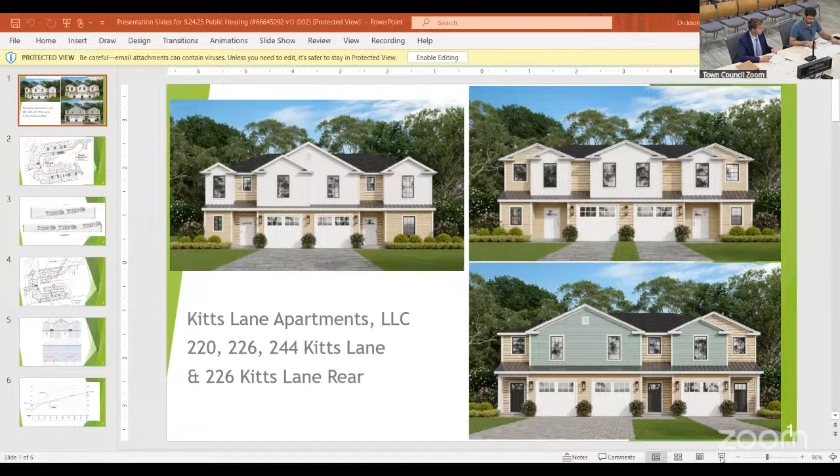So we would request as a condition of approval that the park curbing and the mountable curb be acceptable. The fire trucks are able to maneuver through the site according to that turning plan without running into the curbs. It is just an extra measure that we offer to give the fire chief and his staff peace of mind. I think that's it for the turning movements.

Then regarding the snow storage areas, we have revised them to mitigate the possibility of icy conditions in their vicinity. On the landscaping plan, note 6C was added: particular care shall be taken to maintain emergency access. Snow shall not be allowed to accumulate immediately adjacent to the hammerhead turnaround locations to allow for fire truck overhang. Fire hydrants shall be fully cleared for access. Sidewalks shall be kept clear to maintain additional clear width along interior roadways for emergency access and maneuvering.

So we do not anticipate any maneuverability issues resulting from snow storage areas with those changes. The third concern that we addressed was turnaround of the fire and emergency vehicles at the south side of the site. We provided a second profile, which the fire chief reviewed, and he brought forth the additional concern that there may not be enough clearance at the critical point in the vertical curve.

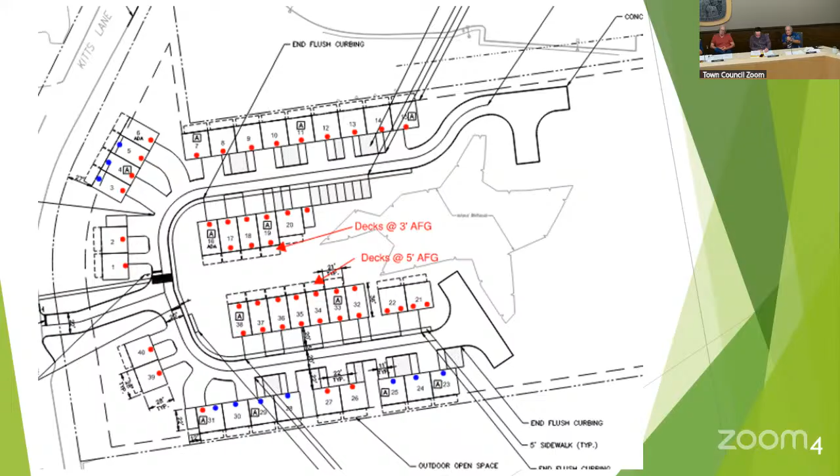Now, if we had to use the ladder truck at any one of the curves, will there be enough room for the pedestals out there, out from the additional 8 feet, 6, out further another 8 feet? Would there still be enough room for apparatus trying to get out the other way to come by? Will they be able to put those pedestals on concrete rather than on any pervious surface? And what about the grades? It doesn't look like, from what I've seen on the plans, that the grades are conducive to a safe setting up of a ladder truck.

So there's a couple of questions there, but what I heard was, can the vehicles navigate the curves? And are the vehicles affected by the vertical geometry of the road? The turning plan you see before you, which is turning sheet 1, shows that the design vehicle, which the town provided the data for, can navigate from the front of the site to the rear and make a 3-point turn around and park. And it's the full-size large truck that the town of Newington owns today, based on the measurements that the fire marshal gave me. I believe that vehicle is as wide as it can be. I don't think there can be a vehicle larger than that permitted on the road.

So the other question about vertical curvature is addressed on sheet turn 2. We created a profile at the critical point in the property where there's a steeper grade and a sag curve. And what we determined in meeting with the fire chief was there is some additional clearance needed. We will address the grading at that point to satisfy his request, that there will be a minimum of 8 inches of vertical clearance under the design vehicle at all points along that curve.

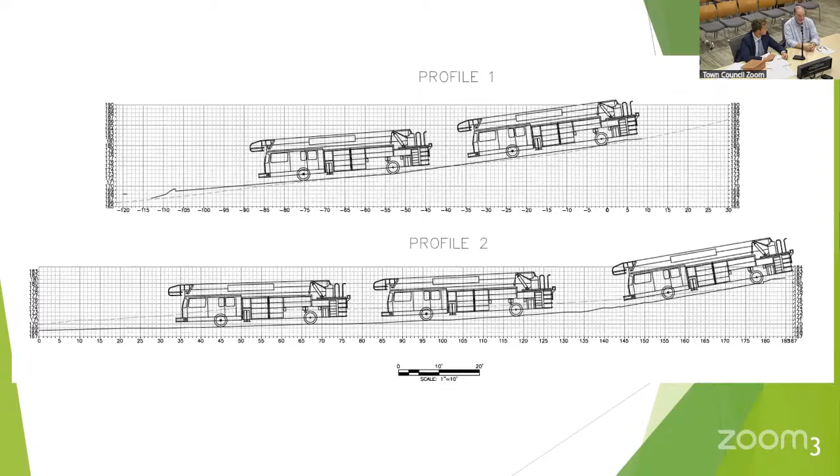And these are not because it's unique to Connecticut, but Connecticut adopts the National Fire Protection Association standard and the International Fire Code standard. And these are requirements that are applied nationwide. And they're developed by technical committees that have members from the National Fire Chiefs, fire marshals, building owners, fire truck manufacturers. So every philosophy is represented in the technical committee and the use of the rules.

I mean, part of my concern is there are some condominiums that were built, as you say, a number of years ago that have one way out. Absolutely. There are others that do have them, but they're few and far between. Right. And that's a concern because if everybody's trying to sail out of a situation, it can get messy.

Well, I'll tell you, we have communities in New Haven, Hartford, Boston's a great example, where the road width was based on carriages from the 1800s. So the fire department deals with them like a long driveway. So the engines assigned to that area don't carry 150 pre-connects. They carry 250s, 300s.

Mr. Chairman, I'd like to ask two other points away from the fire issue. The T2 survey, which you could object to, are you adamant that you wouldn't have any interest in performing that? Correct. You're satisfied with the level 2, which was the flight over the area that Mr. Tarbuck performed. And then the supplemental one that he did, I'm not clear on what's involved in the supplemental. Do you have more specifics you can give us on that? Yes.

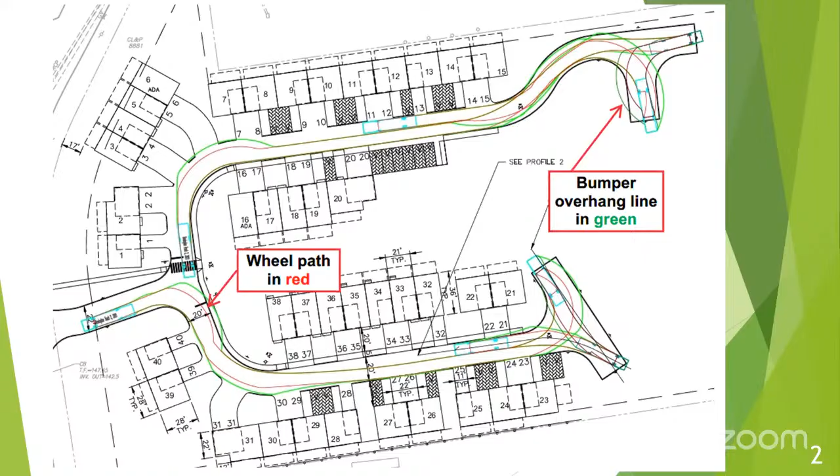Okay, Chairman, just trying to verify the topography. I'm not looking at grades and elevations and topography. Is 8 foot going to be adequate enough to basically rise above the elevation of the resident windows? I'm just trying to get a handle on that. It's not going to be enough to completely cover the unit, but again, with the other sound attenuation measures that we've proposed, we believe it's adequate. Okay, thank you. That's all. Thank you, Mr. Chair.

Mr. Chairman, and Mr. Planner. Attorney Moran, if this would work for your flow right now, if we could bring in Mr. Brooks, since we're kind of talking about noise right now. Yeah, that's right. So, Mr. Chairman, if I could, can I just ask a question first? Yes. I have two, actually. One's for you, but the first one's for Attorney Moran and Mr. Bestich. I just want to make sure that we're clear.

When you spoke earlier, you said that the fire truck maximum, any vehicle maximum width in the state of Connecticut without being placarded is 8'6". That, I believe, somehow got interpreted at this table that the fire trucks are 8'6". Everything that you submitted to us on your documents shows the fire truck 8 feet. Okay, excluding the mirrors. So they're 8 foot, not 8'6".

Right. Okay. And then, Paul, to you, our regulations, I'm assuming state statutes, allow a road to be 20 foot wide for this type of development. Is that correct? I would have to check the regulations specifically, and I can definitely get back to you on that one, but I do not see anything that requires too much in the regulations. Most of those are actually either by the subdivision regulations or by the engineering details for the town of Newington.

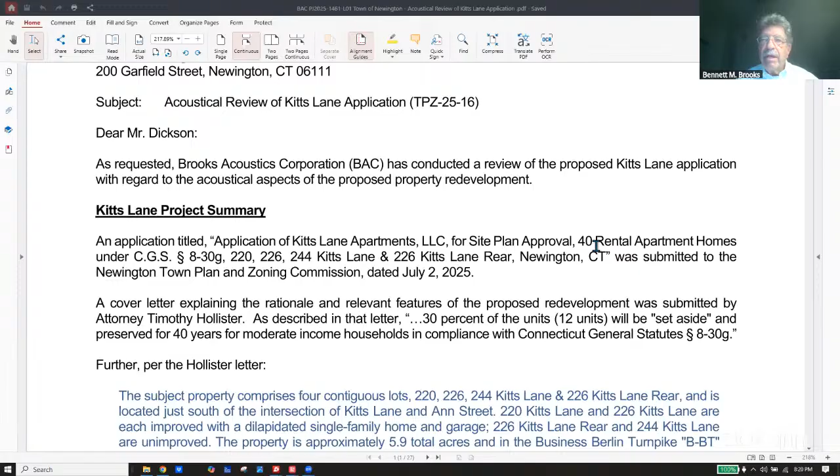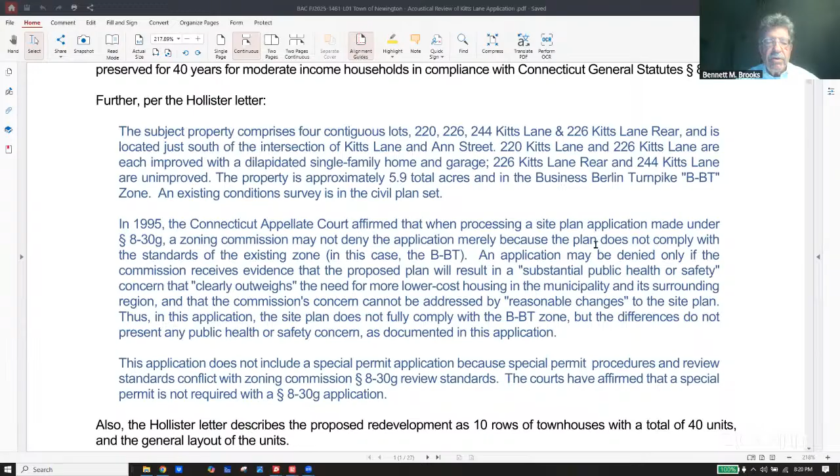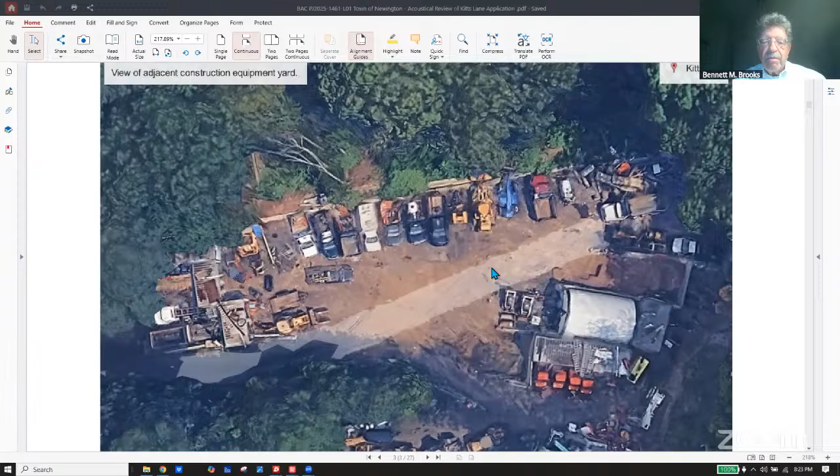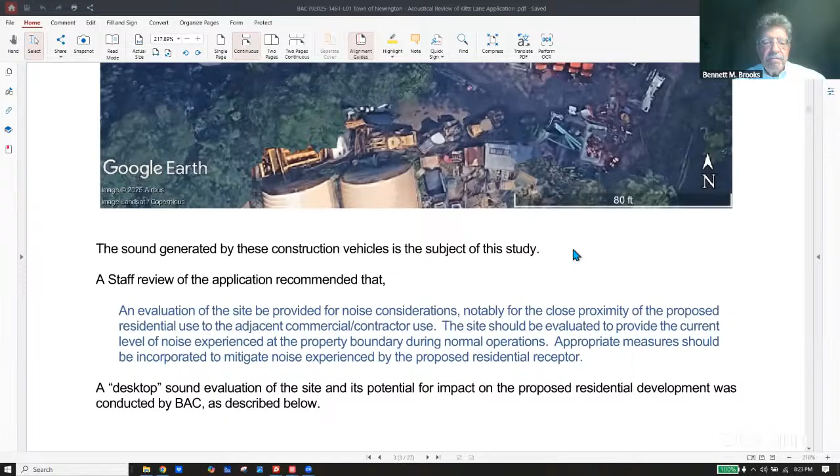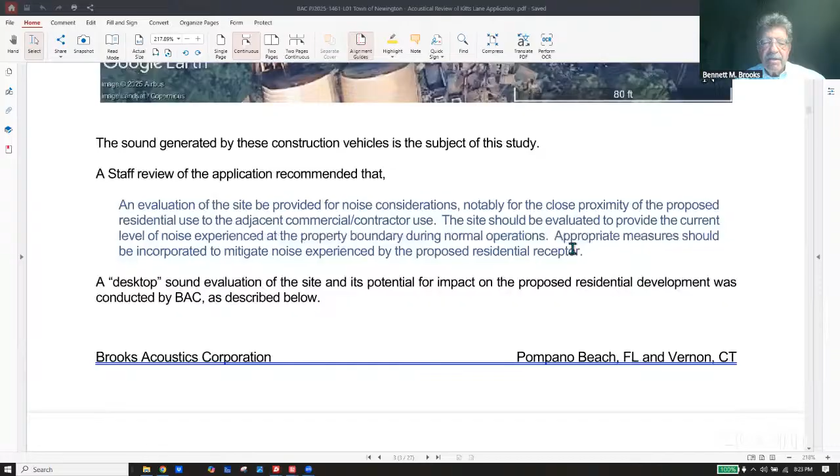So it was reported that these would fire up early in the morning, and people have noted the early hours, and then would go to a job site and may return later that day. There may be some pieces of equipment that are being repaired or otherwise used on the site during the day. We're not sure, but it probably depends on the day-to-day operations that they're doing. So it was a staff request, because of the proximity of this activity to the proposed development, that it be studied in terms of noise impacts. And so that's what we did.

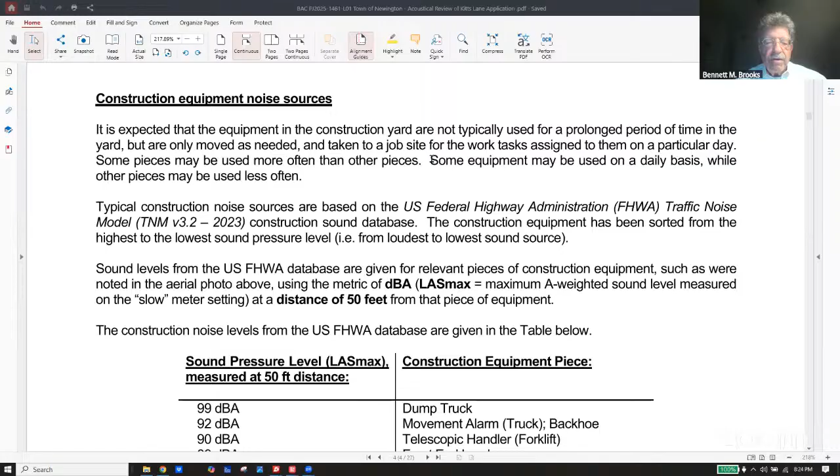Doing an analytical study, or what's been called a desktop study, using typical sound levels. There was no sound survey to see exactly what sound is emitted by the existing use to the south. So we used typical sound data from the U.S. Federal Highway Administration, which has software called Traffic Noise Model with a construction sound database.

Here's a selection of some of the pieces of equipment that are typical, that we saw from the overhead view. There may be others, but this is a pretty good list. I don't think they're pouring concrete in there; concrete trucks are a little bit louder.

So we went from about 80 dBA, decibels. The little d stands for deci, or 1/10. The B is for Bell, after Alexander Graham Bell, the telephone guy, honoring him. And the A is for A-weighted human hearing sensitivity, which is what most of the regs are written to, this metric, dBA. The Federal Highway Administration measured all these things and gave us data at a 50-foot distance, normalized to 50 feet.

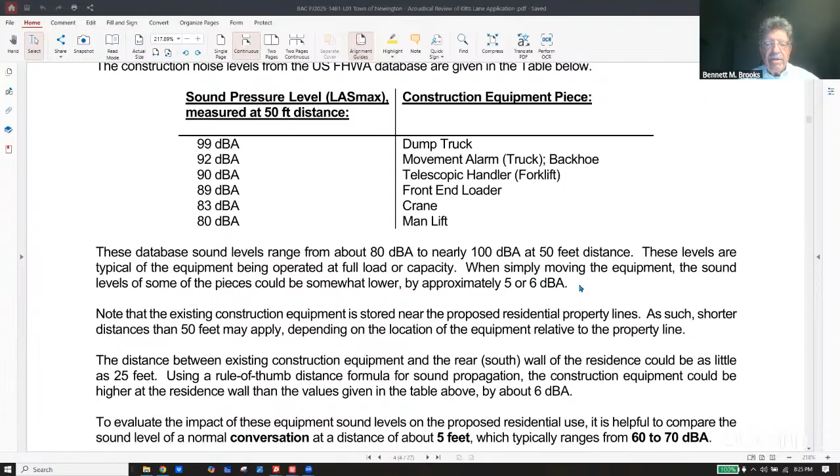You could say, well, if they're operating under full load, this is what they'd be at max, and maybe the levels are a little less if they're just moving, leaving, or getting loaded onto a trailer, for example. So we took that into account by allowing about 5 or 6 dBA below these numbers.

Then there's a distance rule. These data are normalized to 50 feet, so we said, well, they could be as close as, say, 25 feet to the proposed residence. That cuts the distance in half, and the distance formula rule of thumb is about 6 dB per doubling of distance, just based on the geometry, not walls or trees or anything else, but just distance. So that kind of is a wash.

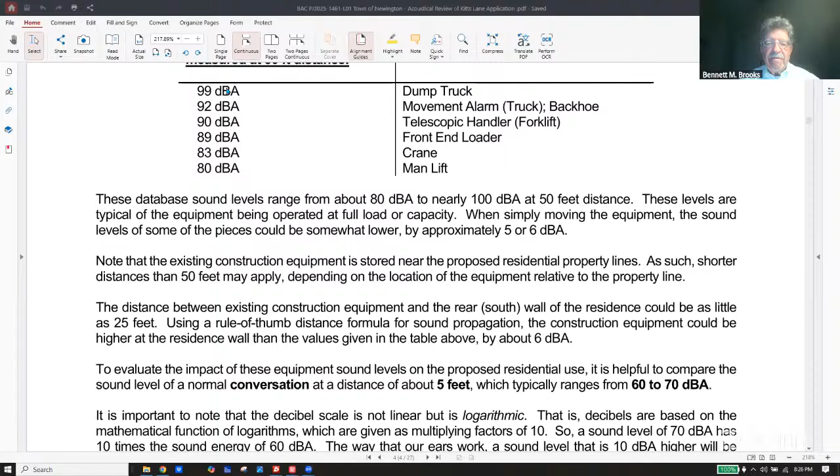So we'd say, okay, these are pretty good numbers for what would be impacting the south facade of the proposed residences. To compare, the 80, roughly about 80 to 100 depending on the piece of equipment, a typical conversation would be at a distance of 5 feet.

You always need a distance when talking about sound pressure levels. The closer you are, the louder it is; the further away, the softer it sounds, and the numbers bear that out. So a conversation is about 60 to 70, compared to 80 to 100 as the equipment goes. And that's without any treatment -- that's what you'd get at the south side of the residences: 80 to 100.

Now remember the decibel scale is logarithmic, not linear. 80 is not double of 40 -- it's actually 4 decades above it. It goes by factors of 10, sort of like the Richter earthquake scale. So 50 is 10 times the energy of 40, 60 is 10 times 50, and so on.

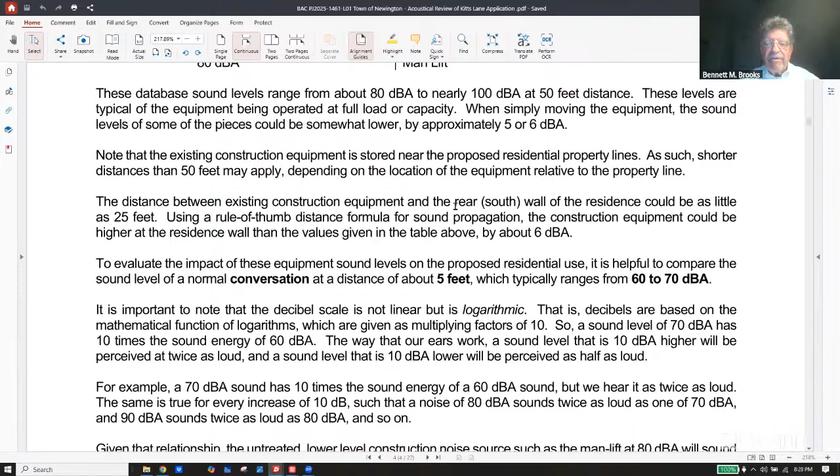But the way our ears work, a 10 dBA higher sound is perceived as twice as loud. We don't follow the sound levels directly -- we get less sensitive as it gets louder, which protects our ears. So when you think of a 10 dB increase, it's roughly twice as loud. If you went from 60 to 70, approximately, you'd say that sounds about twice as loud, and going the other way, about half as loud. That's something to keep in mind.

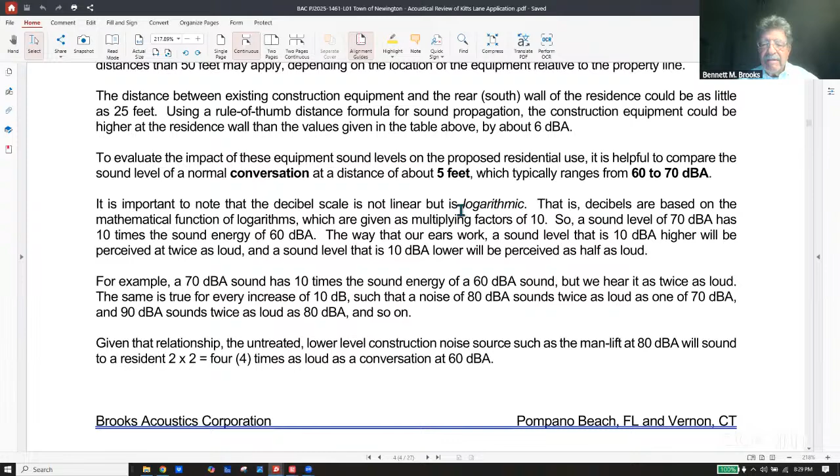As an example, let's say 80 dBA from one of the equipment pieces, the man lift -- if you drop to 70, that's 10, and another drop to 60 is like a quieter conversation. That man lift will sound about 4 times as loud as the conversation. That's something to keep in mind, and that's the perception.

So once we had that settled -- the sound sources and typical levels -- then we go to the plan. What we were able to see in the plan is that particularly units 23 to 31 are abutting the south property line. So looking through that, we developed...

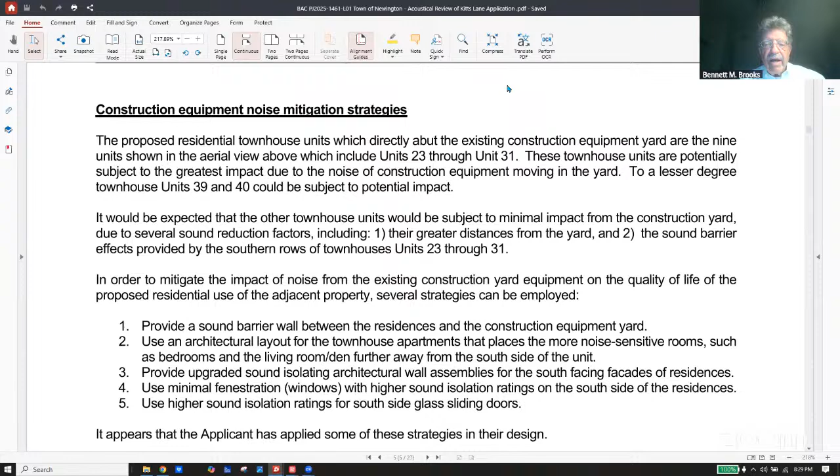...5 strategies or concepts that can be used to reduce the impact of any sound, or if perceived negatively, noise, from the construction yard to the proposed properties. One was the sound barrier, which was mentioned also -- the attorney for the applicant mentioned these, so you've heard them. Another is adjusting the layout of the building so that sensitive areas are further away, on the other side of the building from the noise sources.

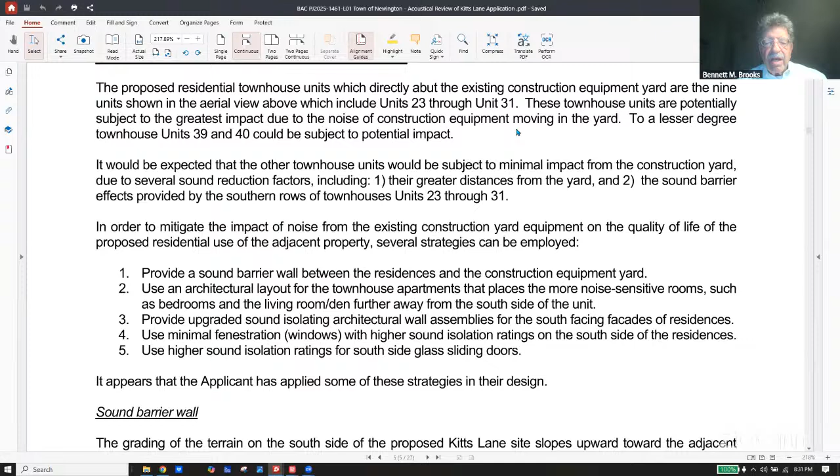It's important to make sure that the south side wall assembly is robust and will be able to block the sound that hits it. There's a lot of ways to do that, so I didn't specify a particular assembly. I'm not sure if this is even going to be stick built, but if it's timber construction, it could be an 8-inch or 10-inch stud, or double studs. Masonry can do it too, and of course insulation is important. You may need a double layer of gypsum wall board, GWB or sheetrock on the inside that's furred out or on its own tracks, its own stud row. So there's a lot of things. That's a design issue. This building hasn't been designed yet, but that's something they need to pay attention to, and they said they will.

And then the windows - the windows are the weak spot, the weak link. You get a good wall, then the sound coming from that source will go through the windows because they're lighter. They tend to transmit more sound. They're not as thick, and they don't have the advantage of having two panels that are as much as half a foot or even more apart normally, because they're probably operable, I would think. So they have to be tight windows with good glass and higher ratings. And they did a good thing on their concept or schematic drawings where they limited the number of windows on the south side - there's just a few bathroom windows and one over the kitchen sink.

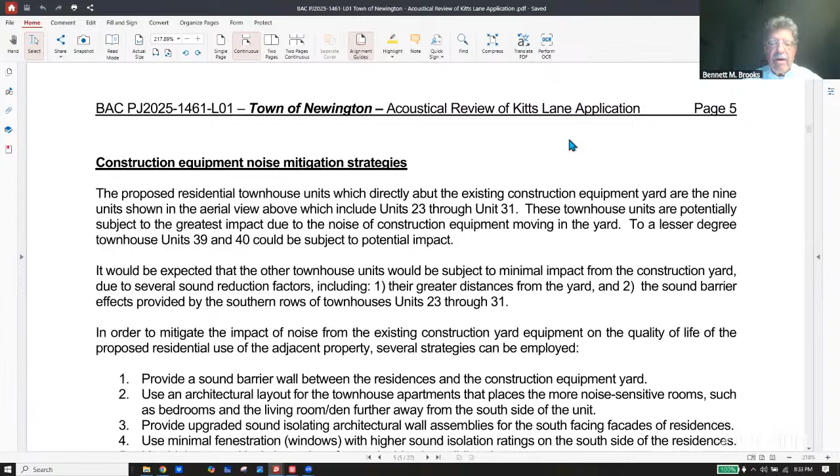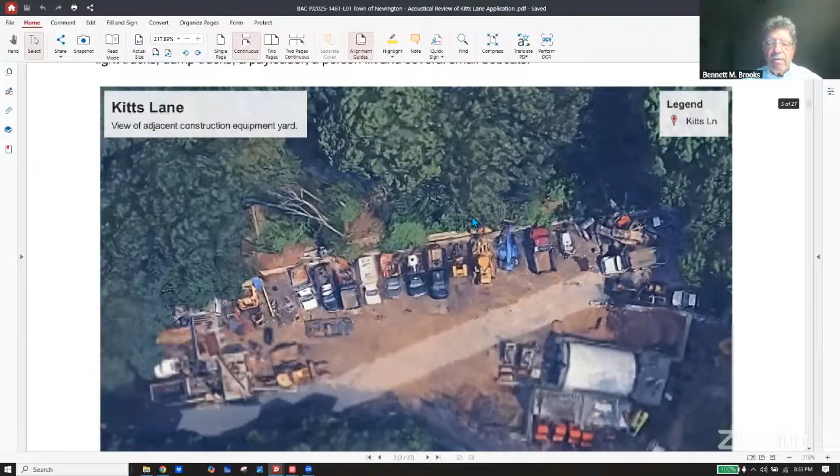So let's talk a little bit about these design strategies. Here's some elevations that were provided in the application. The one on the left - those we got drawings for units 26 and 27. If you remember, we'll go back there just a moment to show you. Those are these two kind of in the middle, sitting by themselves. And here's another to the east, a row of 3, and to the west, a row of 4. They have different floor plans and different sizes, but we got sketches for these two in the middle, so that's what we analyzed.

Okay, back to there. So you can see very limited windows, smaller 2 by 2.5 foot size windows for the bathrooms upstairs, and then one over the kitchen - this is bigger, it says 5 feet width. I assume it's going to be a typical standard door size, 7 feet high, so that would be a 5 by 7. So most of the sound downstairs is going to come through here, and then some up here in these windows. And then you can see on the east and west side, there are no windows.

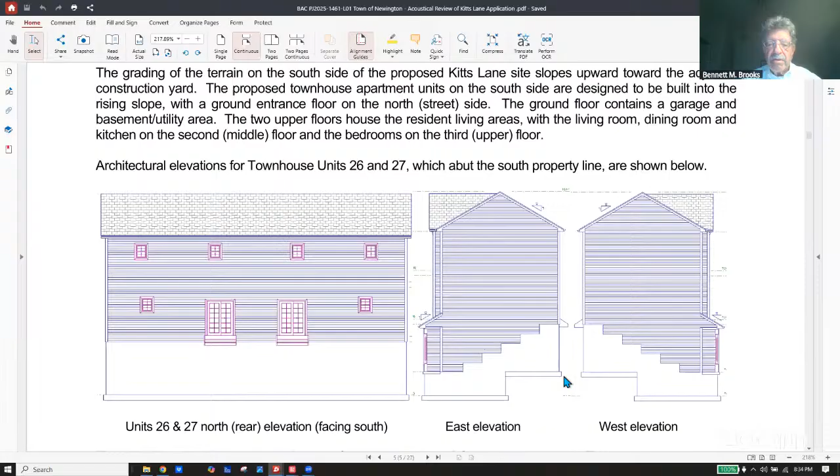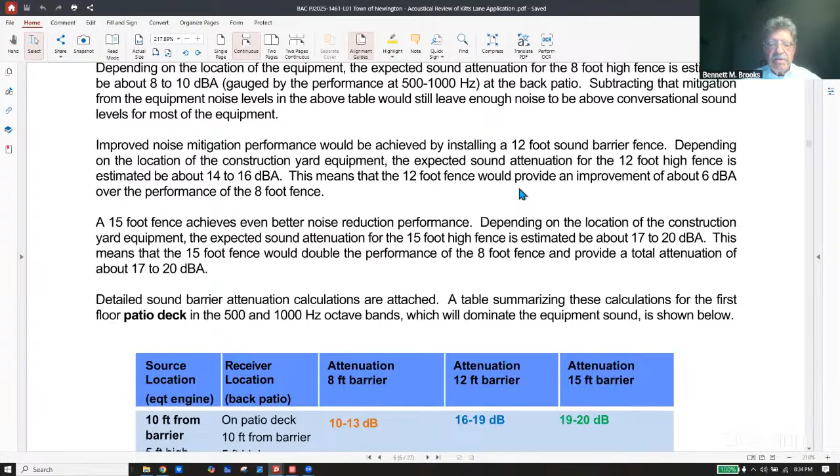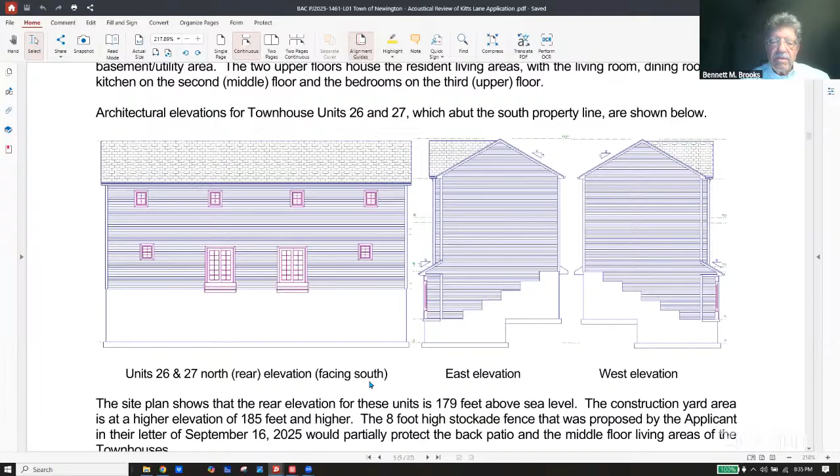Okay, so we did a fairly extensive study on the effects of different fence heights, because of the changing terrain. If you go back, you can see here that if we're looking east, the front of the building is at a lower elevation. So where my mouse is, that's where the construction yard is relative to this side of the building. This is the back, and if you want to get to the construction, you go up a hill further, and it continues sloping up there. So if you look at the site plan, the back of this building is flat, at 179 feet. Where the trucks are driving around is about 180 to 185, and it goes up from there to 190, 200 feet. So the vehicles are going to be at higher levels, sort of comparable with the second floor. You can see there's quite a slope going back up to the construction.

So given that, we took a look at building up from 179, which was that back lot line. We used an 8-foot barrier, which was proposed, and also calculated the numbers for a 12-foot barrier. All of those calculations are included in the back of this report if you want to walk through them sometime - you're more than happy to do that. But basically, it depends: if you're lower down and you're shining a light at the barrier, there's going to be a little sound that peeks over the barrier, just as you would expect. And that's not even light waves, it's sound waves, which are much bigger than light waves, so they tend to bend around corners, if you will. That's what the calculation takes into effect.

And so the lower you are compared to the barrier, the more attenuation or sound reduction you get. And then the other feature that we need to keep in mind is that if we were to shine a laser beam on our receiver from where the sound source is, the truck, say the truck engine, its radiator, which is say about 3 feet high, three to 4, depending on the equipment, and then the exhaust might be 8 or 10 feet high, or maybe low as well. But 5 feet as the source height is a pretty good compromise.

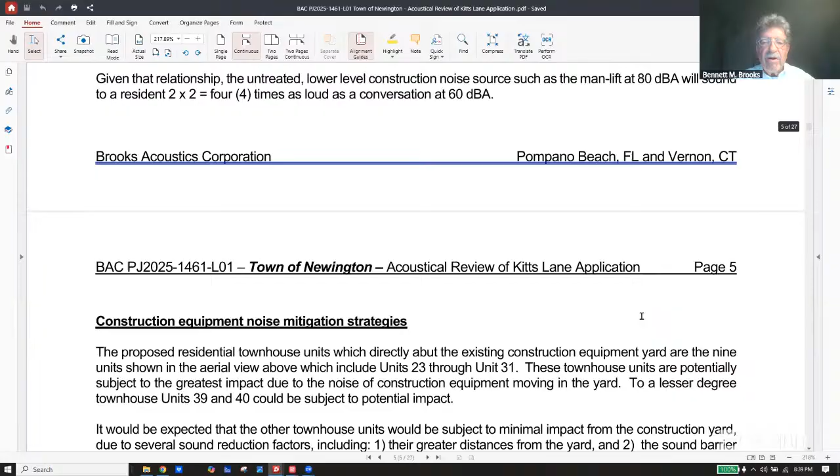Okay, so with all that said, as we move further away from the barrier to the other side of the construction yard where there are vehicles going to be moving around here, you might be 10 feet away here. If it's a 20-foot truck that's in there, they're backing in. So that's good. The engine's pointing to the south, but you might get the exhaust underneath or there might be a backup alarm. So we took 10 feet and then about 50 feet for this equipment over here. You're getting less of a barrier effect for these when they're down at 50.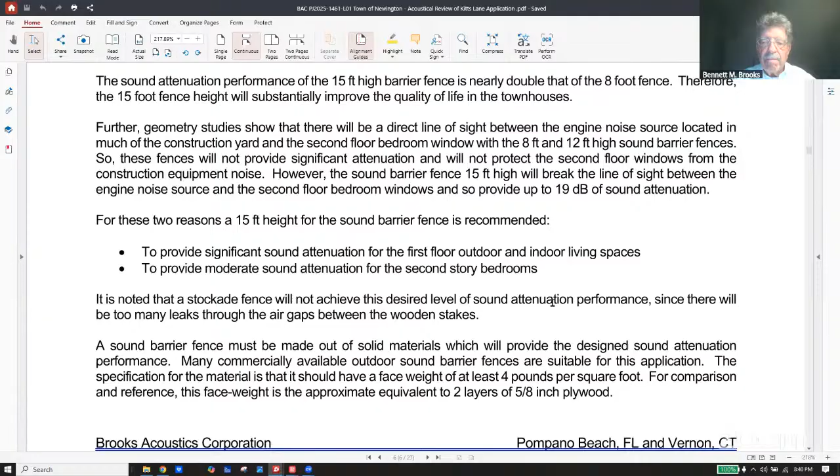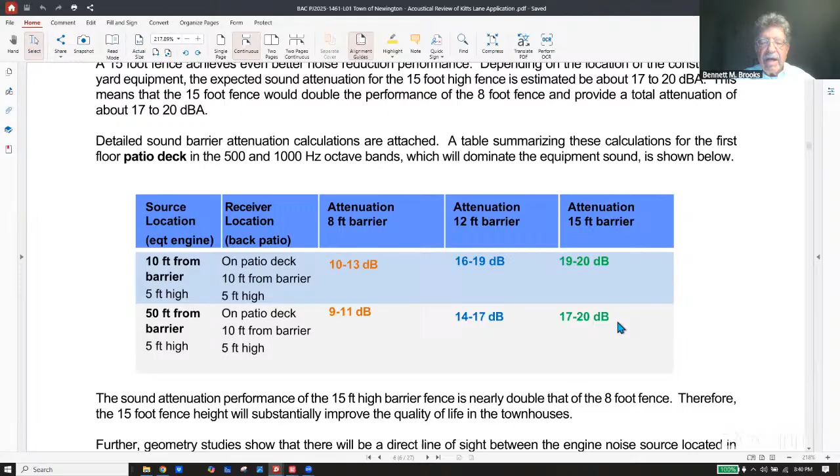Okay, so bottom line, we're getting better numbers out of the 15-footer as you would expect on the patio deck. And then we move to the architectural layout, which seemed to be a good job. You're not getting much here on the first floor, which is actually the middle floor, the ground floor. I guess the basement is the garage. I didn't show it here, but it's on the plan. You do get the kitchen in between, but it's a fairly open plan. You do have the stairway going up, but it's fairly open, so the sound is going to bounce around or reverberate inside here. And we didn't take any benefit for that. It depends on the furnishings a lot too.

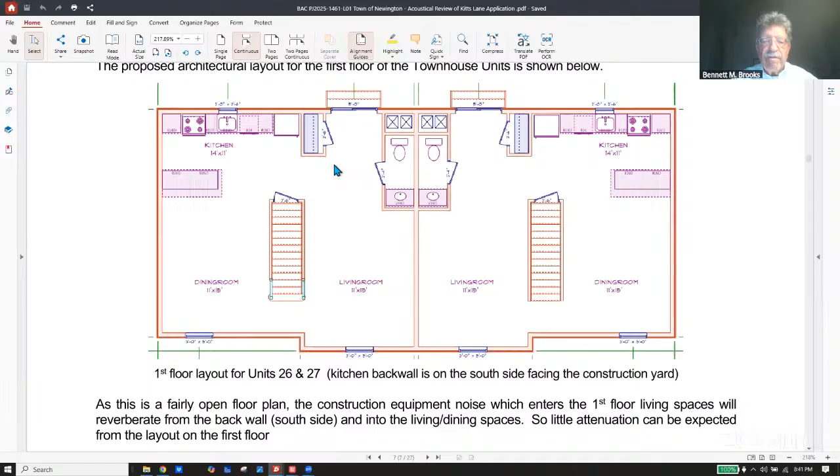So you might get a few decibels reduction in this plan on the first occupant floor. But in the second floor where the bedrooms are, and this is probably more important because this is where people sleep and they want it quieter at the late hours of night or early hours of the morning, the benefit here is that there's a wall assembly in between with doors. The bathrooms, this is a good space. Space provides sound attenuation. So we have a lot of that going on with the laundry, I believe that's the laundry, and then the bathroom here. And both bedrooms have an ensuite bathroom.

And here's another closet too. So there's pretty good attenuation going through this way. And we were very conservative. We took about 12 decibels for that. It could be a little higher. Somebody might leave the door open, so that would allow more sound through. And so that situation is to be approved of. It's a good situation.

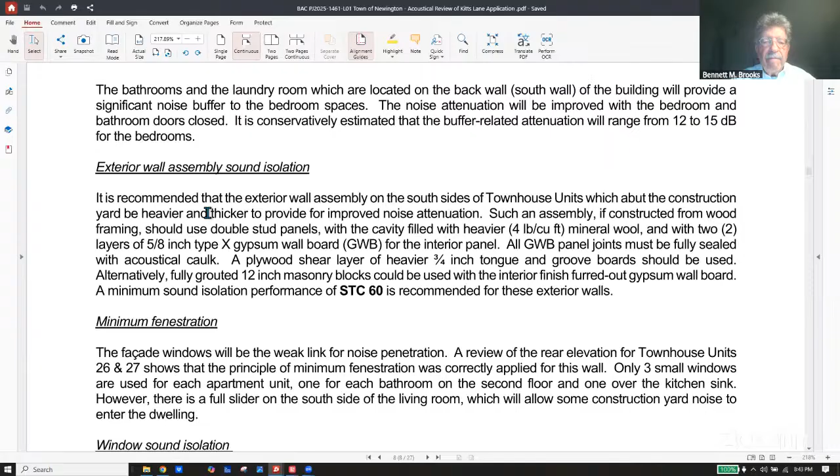Then the exterior wall, we said, here's some suggestions as far as the mineral wool, layers of gypsum board. Some builders are building without a shear layer. I've seen where there's a piece of plastic as a vapor barrier, and they just throw a few extra 2x4s in there for shear so the building won't tip over sideways. But most builders, I think, are using shear layers, some plywood or OSB. So you want that heavy one on the south side of the building.

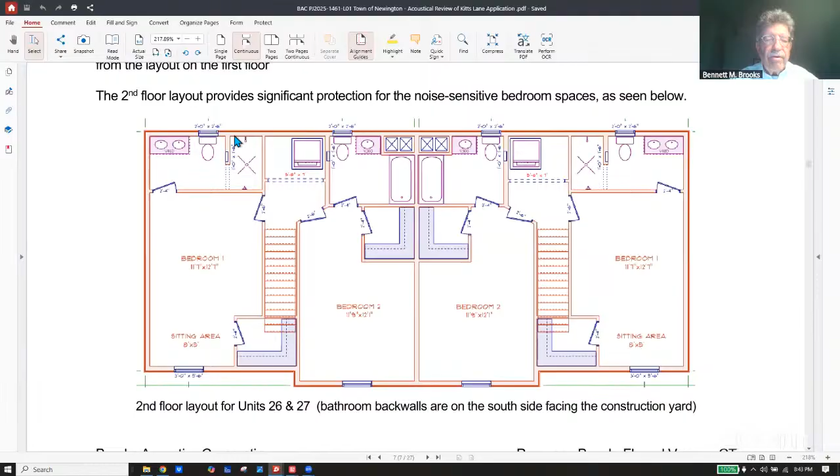And so there are many different assemblies that could be used, but to give it a performance factor, we specified that it should have a minimum sound isolation performance of STC 60, which stands for Sound Transmission Class. That's a standard rating. That's fairly high. If you're in an apartment, this demising wall, for example, state code minimum by comparison is STC 50. So from this bedroom in this unit to this bedroom in that unit, you need to have at least an STC 50, and we know what assemblies will give us that.

And my recommendation to any developers is always go higher than that, because if you design to the code minimum, there's at least a 50% chance that you're going to fail. That's not part of this review, it's just a rule of thumb. And some of my colleagues say it's 70 or 80% failure. So we usually put a 5 decibel safety margin on any specification that has STC for sound transmission.

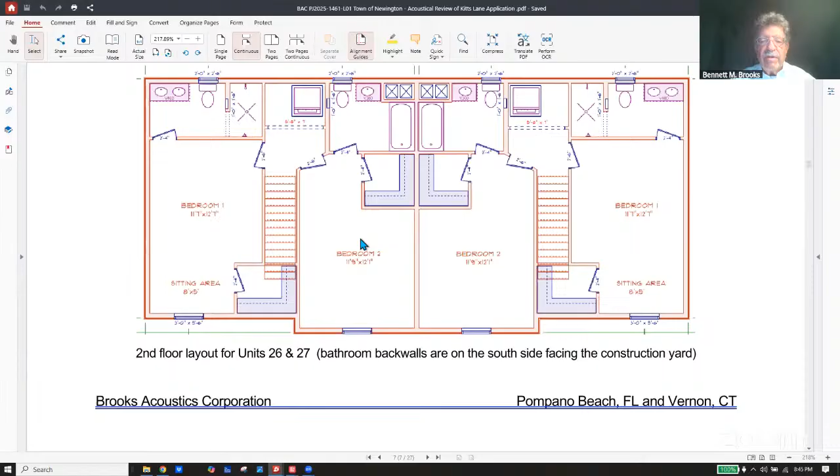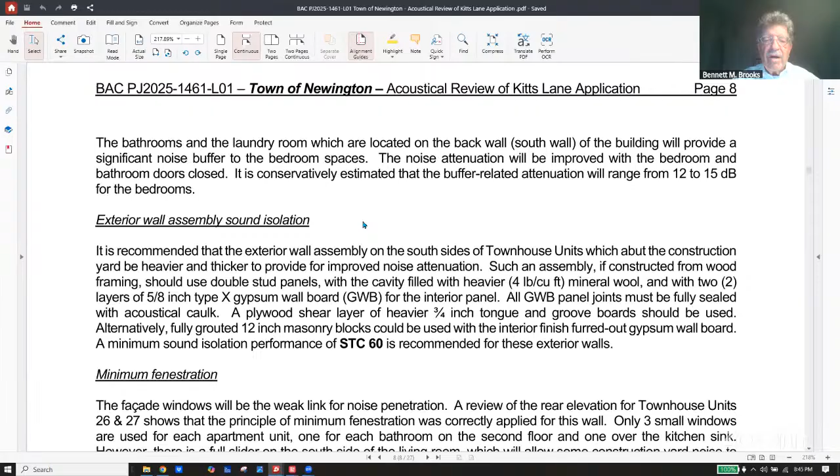So just for safety, for installation issues, somebody maybe forgot to caulk the runners and then it's covered over and it's too late, things like that. So there's always a lot of detail to be done to get good sound isolation. The little caulk gaps, believe it or not, are a mouse hole and let a lot of sound out or in.

And so moving on from that south assembly, we want to have the minimum windows, which they did a good job on, smaller windows. But each window needs to be double pane, double glazed, insulated, so there's an air gap of at least a half an inch, and then laminated glass, which gives you a little more. They could be two 1/8 inch panels laminated with a 60 mil plastic in between. That gives you better sound isolation than just regular glass, because if you bang on a window, you'll hear it ring a little bit. And the plastic lamination gets rid of that. It's also safety.

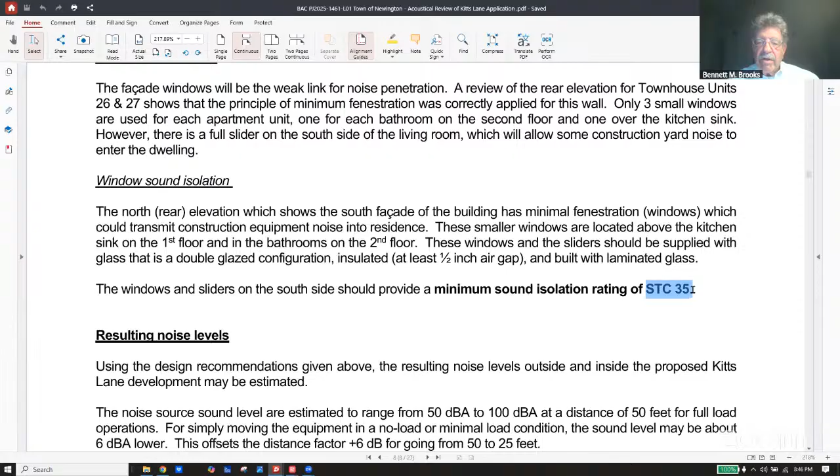And so if you have two of those laminated panels with a half inch between, you're pretty much going to hit STC 35, which was our recommendation there. Many types of windows are rated for storms, hurricanes, object protection for things flying around, like propane tanks in the air hitting your window. So if you get a good hurricane window, you're probably going to hit the STC 35.

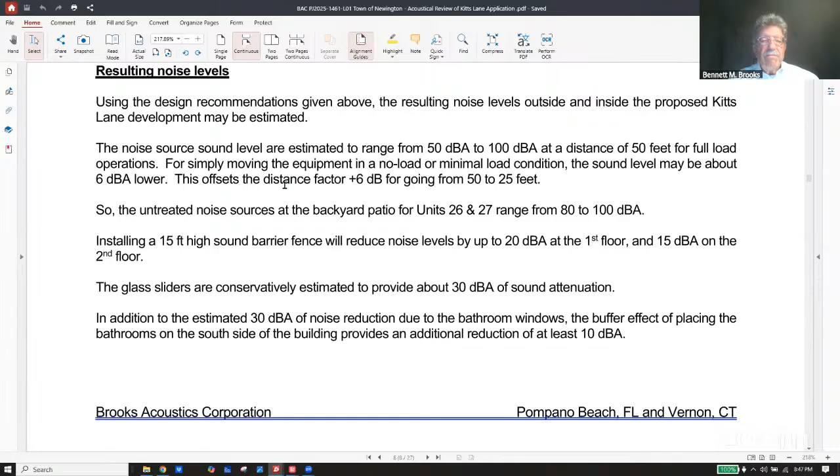And then we said, okay, given these types of strategies, what can we expect at the residence? And so there's a typo, sorry. That should be 80 to 100 at 50 feet, at minimal load, but 25 feet closer. So we're still looking at 80 to 100. The untreated noise levels are expected to be 80 to 100 dBA. That's pretty loud. Your vacuum cleaner is about 75 maybe. A conversation could run from 60 to 70.

You'll have a battery operated hand circular saw that's going to run somewhere in this range, 80 to 100, depending on what you're cutting and so on. So that's a pretty loud thing to happen at 5 in the morning in your backyard. So that's why we recommend a 15-foot high sound barrier, which will reduce the levels up to about 20 on the first floor and up to about 15 on the second floor. So the sound barrier fence or wall will do a lot of the work, but we have to piece together the sound attenuation.

So the next piece are the glass sliders. That's a pretty open spot. That's going to be your weak link if you have a good wall assembly. And we'll say about 30 dBA of sound attenuation, practically speaking after installation, even though it's an STC 35. The STC doesn't exactly match dBA, but we'll conservatively say we'll get about 30.

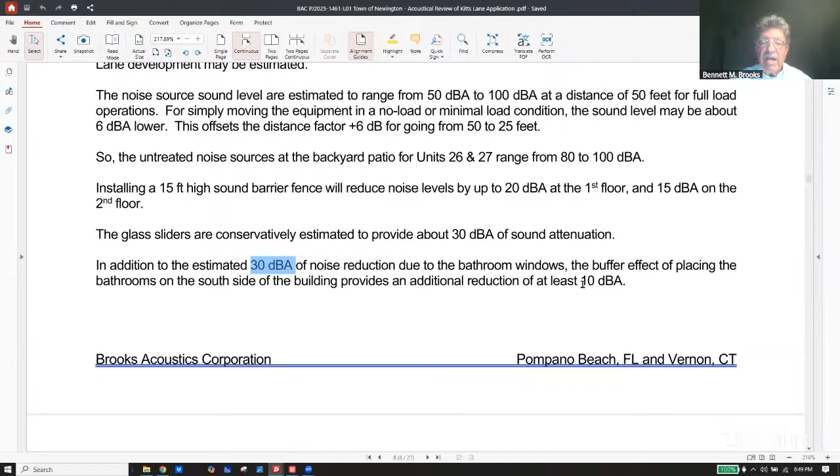And you might get 32, you might get 33, but we'll say 30 here. And then you've got the living room, and that's downstairs with no buffer effect. Upstairs, we'll get the 30 dBA in the bathroom windows, and then we'll add on another 10 dBA over that in attenuation because of the buffer effect. So now let's kind of add all that up.

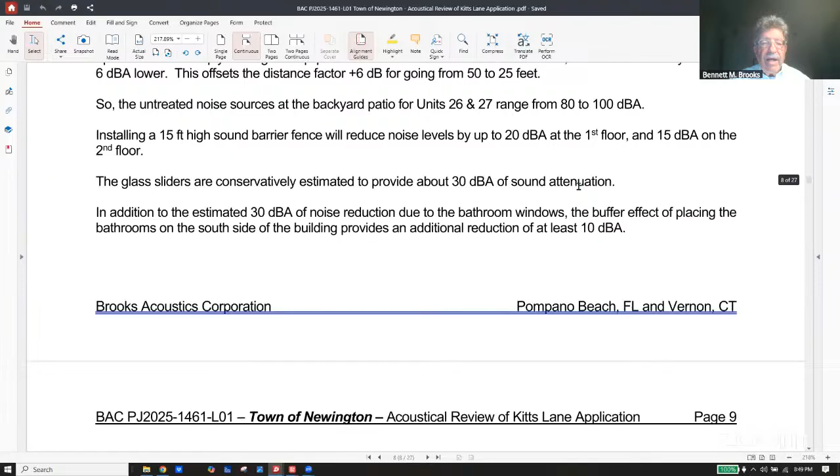As we said before, on the outdoor back patio, you may be 60 to 80. You're probably not doing a cookout at 5 in the morning, most likely, but you might be at 4 in the afternoon. So that's something to keep in mind. That's untreated. Okay, so let's take a look: if we go back and say we're going to get our 20 dB from the 15-footer wall, now your back patio is 20 down from these numbers. So you are now 40 to 60, and that's pretty reasonable.

Oh, excuse me. I'm sorry, I already took that into account. We were 80 to 100, and now we're 60 to 80. My mistake. But that's conversational level. It could interfere with conversations, or it could sound loud. It could be irritating. It's an inconvenience factor, I think, is the way someone described it.

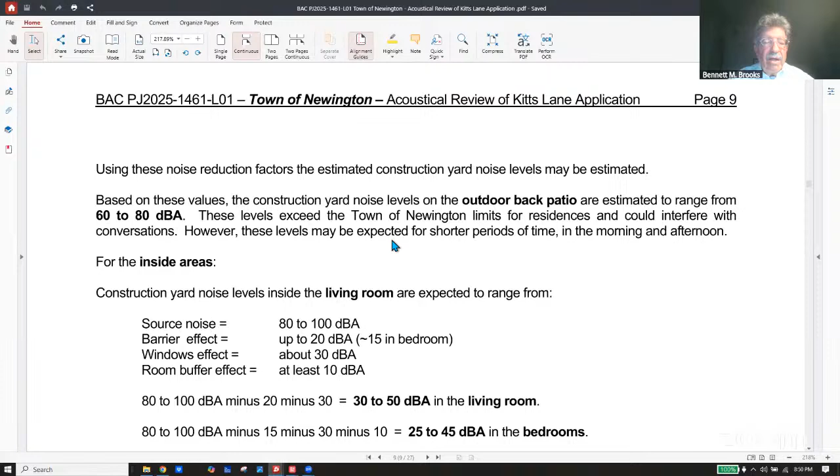Okay, that's outside. So now inside, where we want to be even a little more careful, we'll take those source numbers that we were just talking about, 80 to 100. Let's take, for the first floor, 20 dB off of that. We'll take off 15 in the bedroom. The window effect will give us another 30. And upstairs in the bedrooms, we're going to get at least another 10.

So just doing the math here on this line, 80 to 100 minus 20, which is the first floor, minus 30, which is the window effect. So now we're at 80 to 100 minus about 50. That gives us 30 to 50, if I did my arithmetic correct, in the living room. And that's not bad.

Your various authorities, health organizations, the EPA and so on say that if you're 45 to 50 or so in a living area inside, that's acceptable. So we're definitely in the acceptable range or lower inside with all of these mitigation effects in play.

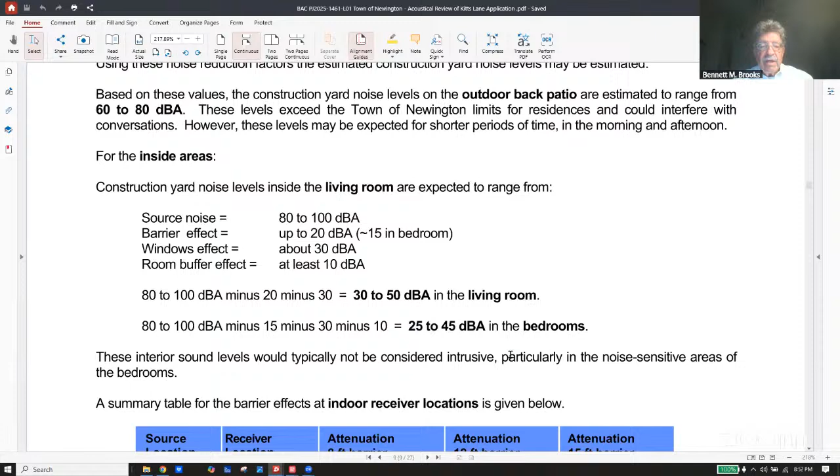And now upstairs, we've got the 80 to 100 minus 15, a little bit less because we're higher in elevation, so we're not getting the full barrier effect of 20, minus the 30 for the windows, and minus the 10 for having to go through the bathroom. So now we're down to 80 to 100 minus 55, so it's another 5 lower. So we're in pretty good shape here in the bedrooms. But again, that depends on putting everything in place.

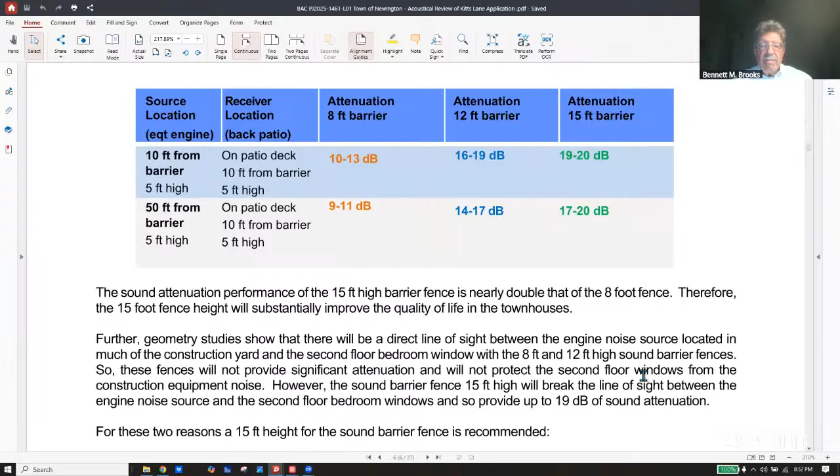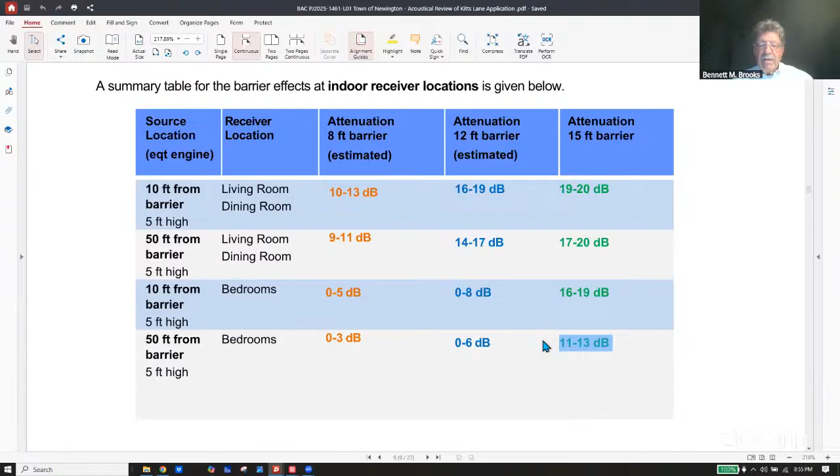You're shooting over the top of it with the sound. You're a little bit further back with the 50-foot, and you're doing the same thing. You're shooting over the top and just kind of skimming over the top on this one. So you can expect basically 0 or maybe a little bit. And then with the 15-footer, you are getting the benefit of the barrier because you are now behind the shadow of the barrier. That laser is not hitting the window because the barrier's high enough.

So given that factor, here are the recommendations. So we said you should use all of these conditions. You need the 15-foot high. Unfortunately, the geometry of the site demands you need the 15-foot barrier fence to protect the bedrooms. The wall assembly should be at least STC 55, or actually I had 60, so that's the safety margin factor that should have been in this here. That's a typo. And then the STC, and that's not hard to achieve, by the way.

And that's just the one wall. It's not the other walls of the rest of the development. And then the one wall that's on the southern boundary. So there are 3 buildings. Just want to make that clear. And then here are the window assemblies.

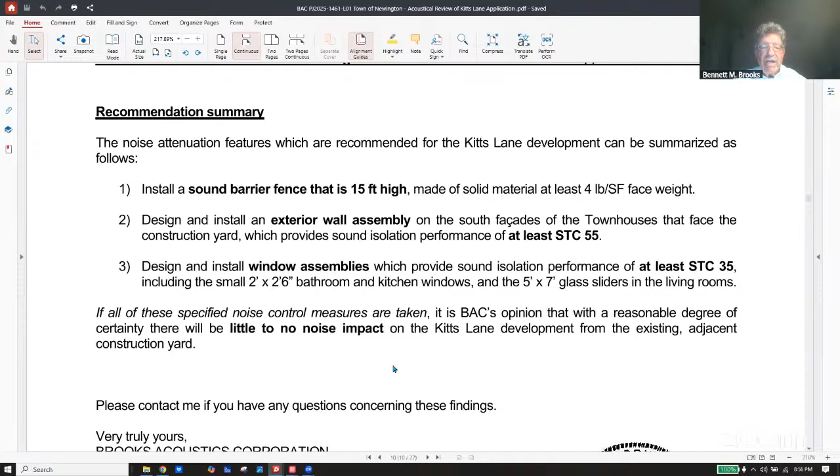We did say we wanted at least a STC 35 for those. So if you put all of those together, you're going to get enough attenuation such that it will be pleasant to live there with little or no noise impact from the existing construction yard. So the rest of this is the calculations which can be reviewed by anybody if needed. And that's the conclusion. So I'm happy to answer any of your questions.

Thank you. Thanks for your time. Well, you all set? Yep, if the commission has any questions. Any commissioner questions? Commissioner Harpy? Just a quick comment. I know the hour's late. Is the company comfortable with acting on these recommendations? Just yes or no would be fine.

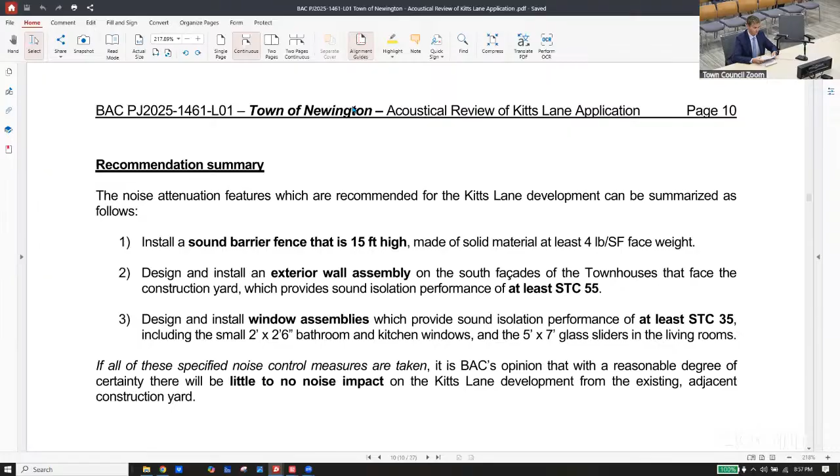No, we can't do the 15-foot fence. This 15-foot sound barrier fence would not make the development economically feasible. We can do an 8-foot sound barrier fence. There's 5 total mitigation strategies on page 5 of the report. We address each of them exactly with his recommendations. The only thing we cannot do is a 15-foot sound barrier fence. The 8-foot sound barrier fence is what we're proposing.

So that's the economics of it for you? It would not make the development feasible. The sheer price of a 15-foot wall, it would not make the development feasible. Okay, and then one other quick thing. Go ahead, Commissioner. Can you tell me, Mr. Chairman, have we taken any actions or has the town tried to reduce the sound from the neighbor that's creating sound problems in the south end of the building?

Yep, so as Attorney Moran did notice, there's been no sound study done on that side, and right now, other than just another contractor's business on the other side, this land is vacant. So that interaction, you don't really know, because it's vacant land and those houses have been vacant for some time. Have neighbors been complaining? Is that accurate or not accurate? I would say there's a lack of neighbors on this side of the construction yard, and on the other side is another contractor. And they appear to share some space in the back.

Because it seems like all the burden is on this entity to quiet, it's not a criticism. It may sound like it. I'm trying to give a little benefit to it. They seem to be carrying the cross of doing these other issues, which they want to do to make the units more comfortable and keep as much sound down. And I never hear any action taken against a noisy neighbor who's creating sound issues, not intentionally, that are impacting this project. But that's all I've got.

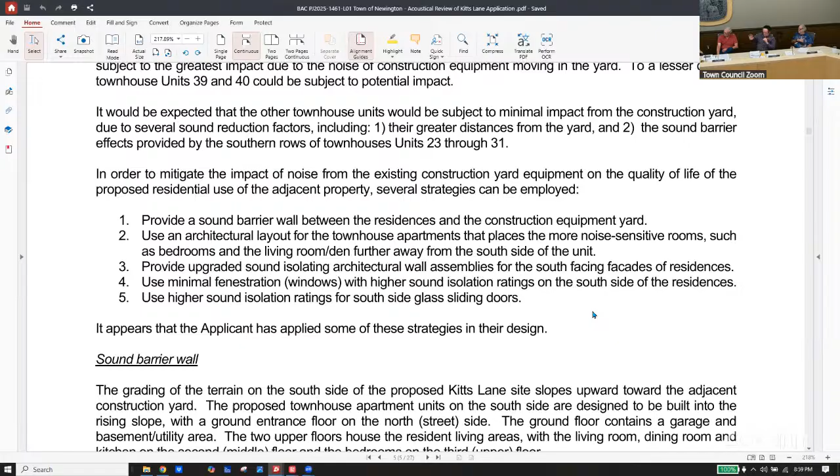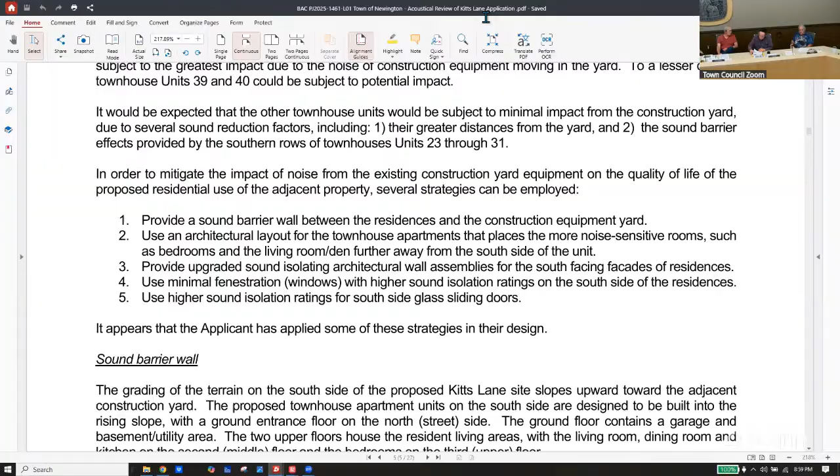Commissioner Fox? Just a comment. Thank you, Mr. Chairman, through the chairman. Sir, have you discussed this with Mr. Brooks? If you don't use a 15-foot fence, and you're doing everything else he wants to do, the way he just presented, what would lowering the fence do to the acoustics?

We don't have calculations on the effect of that variation, but the reason why I disagreed with Commissioner Harpy just now about it being incumbent on the applicant to provide information on the noise is we're in this different 8-30g process here. It's not your typical special permit where the applicant comes in.

You misunderstood me. This thing was falling on you. Right. I was giving you some benefit. Apologies, I misunderstood. He was empathizing with you. Thank you. Apparently not too well.

No, my point is, and I'll keep it short, we're dealing with 8-30g here, and throughout Mr. Brooks's report, he hasn't specified one substantial public health and safety risk associated. So I'll leave it at that.

Chairman, I only have left, I wanted our traffic engineer to discuss briefly the feasibility of, we're proposing as an approval condition, a four-way stop. And just let me find out, any other questions from commissioners on this? Yep. Commissioner Minor had his hand raised. Commissioner Minor?

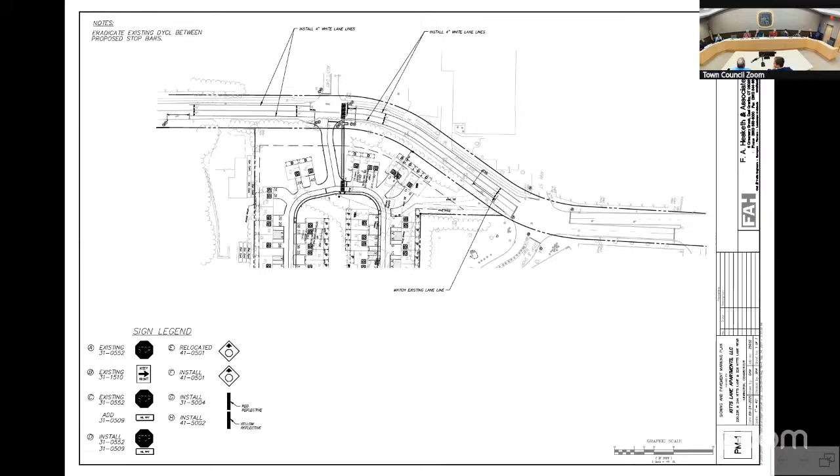Commissioner Minor has his hand raised as well. Commissioner Minor? Thank you, Mr. Chair. Just briefly, any consideration - it'll be a 3-way for Ann Street, 4-way with the new outcrop, and the proximity to the Stop and Shop. I'm trying to think that's a distance of probably 300 feet stop sign to stop sign, is that relatively accurate? It's a little bit more, I would say it's more in the range of 400 to 500 feet.

Okay, and the second question - is it possible to request some selective enforcement through the police department just to see what they're getting for road speeds there? Because I have some concerns with the traffic coming down with two stop signs, one almost on a - I don't want to say a blind corner, but a tight corner, even with the advanced warning sign. Yep, I would say from a town point of view, again this wouldn't be on the applicant to do, but yes, that's something we can explore.

Chris, the town engineer, and I have already talked about it. If a new traffic pattern is put in place, we'll reach out to the T2 Center, as we've done in the past whenever there's a new traffic pattern, and get one of their electronic signs to put out there for a little while to advise of the change.

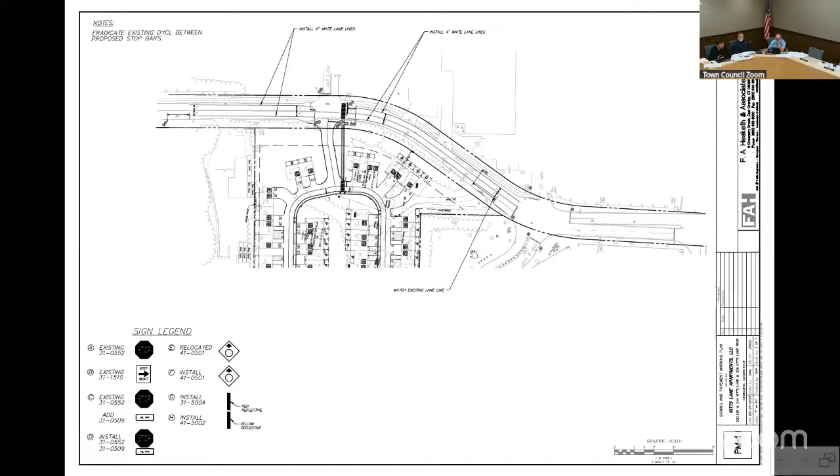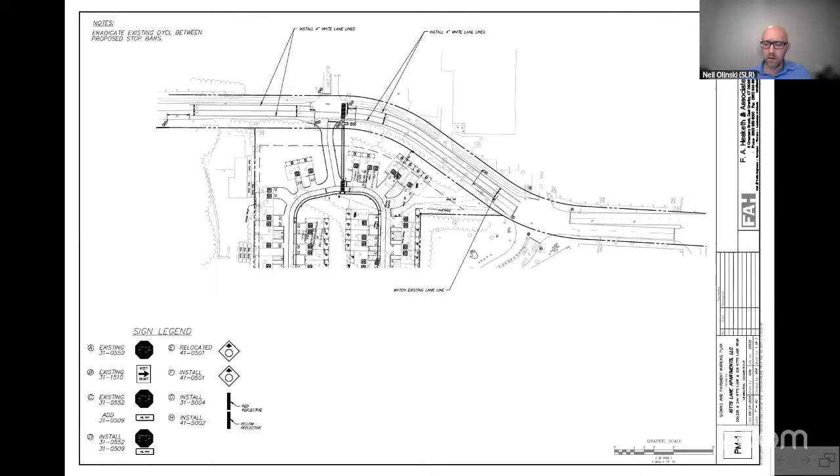Yeah, sure thing. For the record, Neil Olinski with SLR Consulting. I'm filling in tonight on behalf of Anthony Russo from our company—he had a scheduling conflict, but I'm here nonetheless. We did the traffic peer review, and by and large it all comes down to the all-way stop, which, as you've heard, the applicant is in agreement with doing. This is the first time I'm seeing it, so in general it looks appropriate.

There are some intricacies we could look at in terms of maneuverability of cars and box trucks turning in and out of the driveways at the all-way stop. For example, you don't want a vehicle stopped at one of the new stop bars while another vehicle, say a box truck, is turning in or out of the Aldi driveway and unable to do so. So you'd have to look at vehicle tracking, or swept path maneuverability, relative to the proposed stop bars.

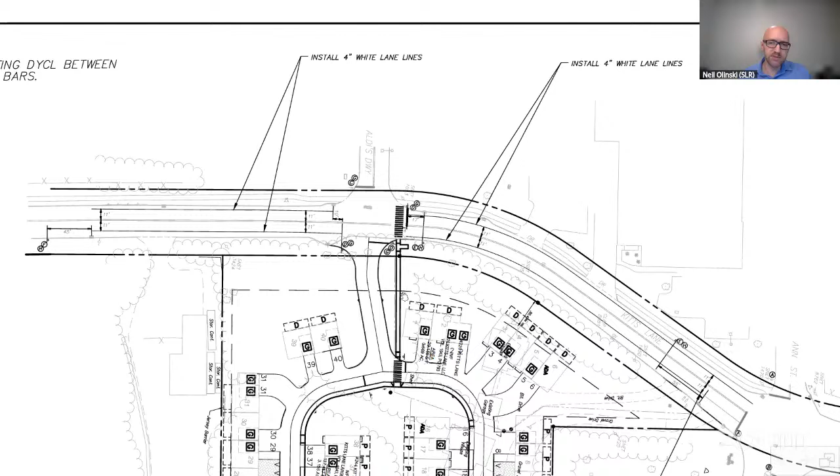But to back up—I could share my screen. I'm hoping the commission has reviewed our letter; I think it was released yesterday. The commission did get it today, and the applicant got it yesterday when it was sent in. Okay, I'll stop sharing so you can take over.

But I can quickly go through the high points to get them on the record. We reviewed several items: the traffic impact statement from Hesketh dated June 23rd, the supplemental materials dated August 21st, a response to comments document prepared by Hesketh dated August 26th, the second supplemental materials dated September 16th, as well as the site plan and sightline profiles.

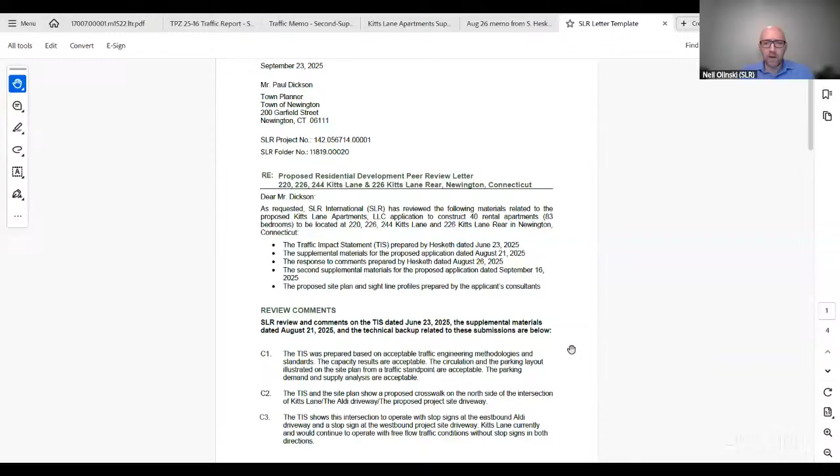Several of our comments are in agreement with the traffic study. Our focus was mostly on safety, but we did look at the traffic study too. We agree with the applicant that there's really no expected traffic flow or congestion issues. With only 40 units on a peak hour basis, we're not expecting level of service impacts to traffic flow or parking congestion given the proposed supply of parking.

But in terms of safety, it all comes down to the speeds out there on Kitts Lane. We're presuming the posted speed limit is 25 miles per hour. The applicant's report states that speed counts were done, and the 85th percentile speeds are quite a bit higher than 25—41 miles per hour southbound and 45 miles per hour northbound. So quite a bit higher than the speed limit, which is worrisome.

When you combine that with the horizontal curvature of Kitts Lane, it gets even trickier. When we consider the proposed site driveway relative to that curvature, a motorist at the egress from the site looking over their shoulder to the north has to stretch even further than typical, as you'd have on a regular T intersection—they really have to look quite a bit over their shoulder. Those three factors combined led us to agree that an all-way stop is appropriate at this location, and we're happy the applicant is amenable to doing that. That was the bulk of our peer review findings.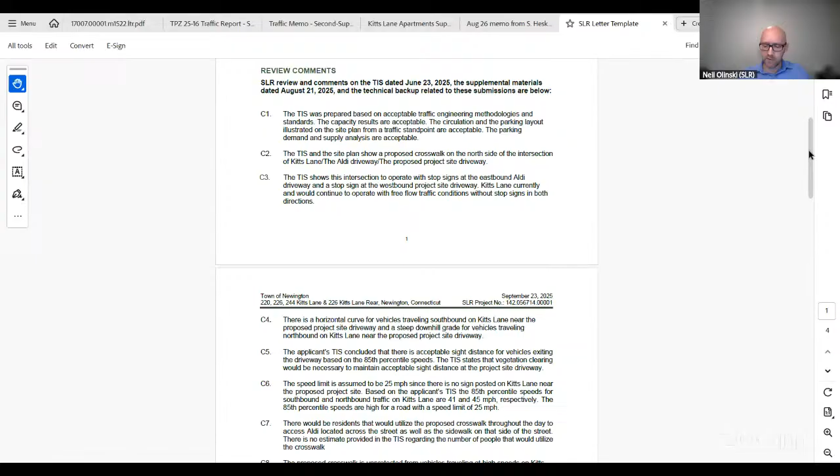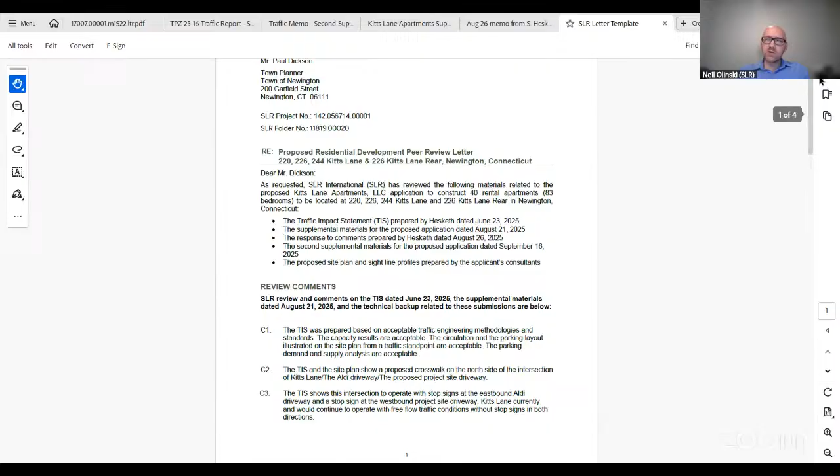I don't want to waste everybody's time going through this verbatim. We do think that in addition to the always-stop, it's a good idea, as has already been proposed, to do some regrading along the frontage and trimming of the vegetation in this area in particular. We think that's also a good idea, just an extra belt and suspenders, in addition to making this an always stop.

North is to the right, by the way. So I think that's pretty much it. The last thing that comes to mind is in our peer review report, we had suggested maybe some additional illumination or lighting at this intersection, again just for extra safety. There is, if I'm not mistaken, an overhead light on this SNET pole. It might not be a bad idea to get some sort of lighting on this side, the site side as well, in the area of the intersection, the proposed crosswalk.

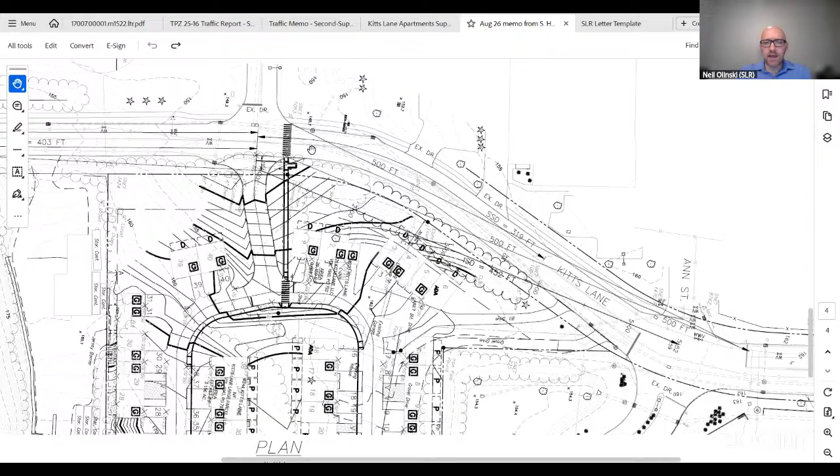So that's pretty much it. Again, I can dig down further into our review, and I can answer any questions on my end if there are any.

The only thing I'd like to add is that interestingly enough, on that SNET pole, a couple years ago there was a light on it, and now the pole was replaced, so there isn't a light on it anymore. That's something we will have to look into as the town. We will handle that, that's not the applicant's issue.

Thank you, Mr. Chair. Just one final comment. The only concern I've got regarding the stop sign location is during the wintertime, Kitts Lane is a notorious area of spinouts on that hill. Having a stop sign not even at the base of the hill, but kind of three-quarters of the way down, is maybe something to consider. That is a problematic hill in the wintertime, and Public Works can verify they have a difficult time keeping up with it during precipitation in the winter. So just a consideration, thank you.

Thank you, Commissioner Minor. Paul, you might want to check with Rob on that and see exactly what we have going on up there.

I think the condominium is Crown Ridge, so as you come down the hill, people come in and out of that condominium, and sometimes they don't stop when they're coming out. There's a big yellow sign that the highway department presumably put up. Some wise guy recently flipped the whole thing and nailed it to a tree upside down, making it a more critical situation, but I don't know if there's any way to cover the Crown Ridge. You'd have to go almost back to Glen Oaks, where those stop signs are, that large condominium, and I don't think you'd have enough running space that anybody would notice. I'm not saying you're suggesting that, but if you get a chance, take a look at what I'm talking about. It's a very small condominium, I think it's Crown Ridge, and it's on the west side as you'd be driving.

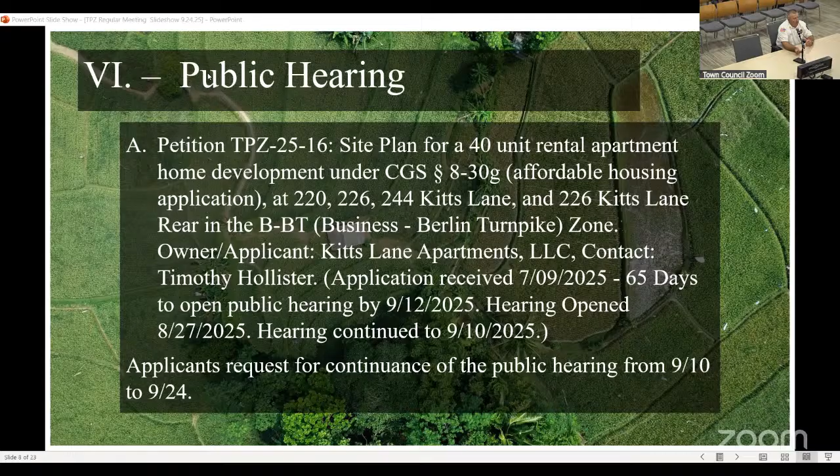The only concern I would have on the fire department side, which we also talked to the developer about today, was the slope on the south side of the building where the decks are. They had proposed putting stairs in, which would help us for access up to the deck areas to be able to fight fires. Our concern was there was such a steep grade that we wouldn't be able to get up there safely. They actually proposed putting stairs even to the decks and up the back slopes to help us out. So I'm in support of this development. I don't see any issues. Thank you, Chief. Thanks, Jeff.

Commissioner Wakoma. I think the applicant has really worked diligently to make many modifications as requested by the commission. And with this clarification and support now, I believe that we could act and move ahead. Commissioner Woods. With that, I would entertain a motion that we close the public hearing. Second. Okay, any other discussion? None? All in favor? Aye.

Aye. Oh, sorry. May I add something to that before we discuss it? Yes, Commissioner Fox. We voted already, but I just want to bring it up for a vote tonight. It's already on old business. Is it? Okay. All right, so we've made a motion, we passed this. Okay, so we're closing it. We'll do old business. That was easy. I guess so.

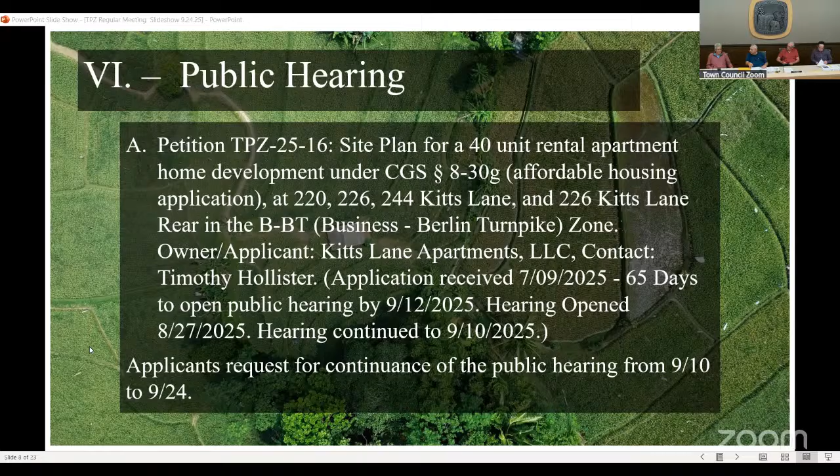Okay, where are we now? The next public hearing. Now, we've got two more public hearings. No, hold on, wait a minute. Got too much paperwork here. Okay, hold on.

Next is petition 25-18, special permit for a physical activity and personal training facility at 2434 Unit 9 Berlin Turnpike in the BT Business District or BT zone. Applicant Revolution Sports Club LLC, owner Trans-Berlin Corporation, contact Robert Maybruch. Application received 8/13/25, 65 days to public hearing, by 10/17/25, hearing scheduled 9/24/25.

Please come up and state your name and address for the record. Good evening, commissioners. Name is Robert Maybruch. My education is in exercise prescription and finance, the owner of the applicant Revolution Sports Club. And the address is 169 Lowry Place, Newington currently. Revolution Sports Club is currently a personal training studio operating in Newington. We've been in Newington for about the last 5.5 years and are just requesting a relocation to the Berlin Turnpike.

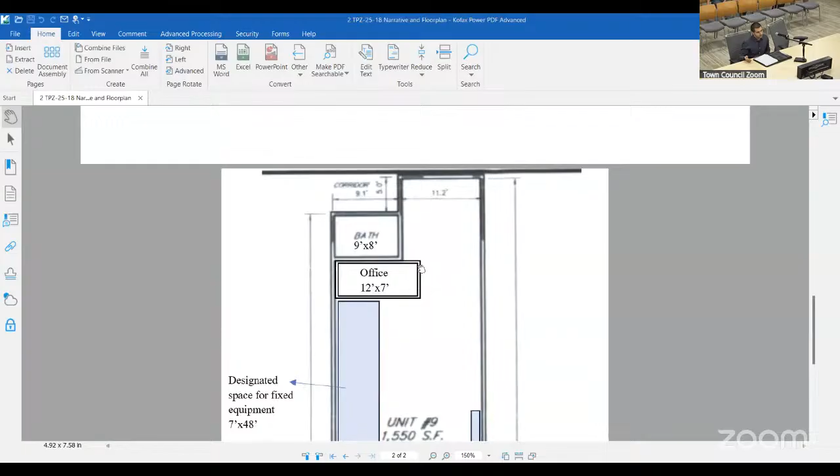So that's kind of the expectations as far as what traffic would be like during those times. You'd expect one coach and between 2 to 6 people during peak hours, mornings around 7 o'clock and evenings around 4 or 5 o'clock. The afternoon hours are mainly filled with one-on-one sessions, so traffic around those times would be 1 to 2 parked cars. I also do some youth training as well, again around 4 o'clock, in the small group setting, so about 6 kids to 1 coach.

As far as the parking available, if you're familiar with the plaza, it has ample parking there. And I've also been honored over the last 5.5 years to be named one of Connecticut's top personal training facilities. And I would love to continue operating in Newington, where I started my business. I'm looking forward to continuing this discussion. If you have any questions, I'd be happy to answer them. Any questions, commissioners?

Yep, I would just add, you can see in the staff report that we reviewed the parking. There is sufficient parking at this location. We have not received any complaints about the applicant's current operations. It is a site that has similar uses and a multitude of uses over at O'Neill Plaza, and staff does not see any issue with the special permit. Thank you, Paul. All right.

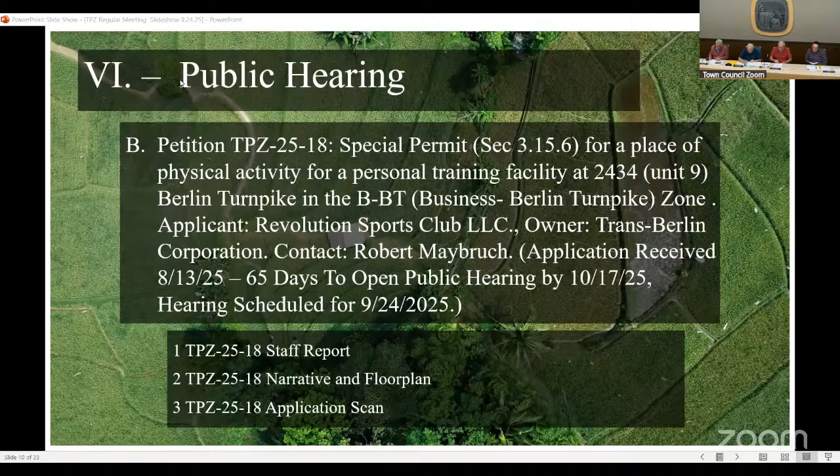All right. Next petition, TPZ petition 25-19, modification of special permits 04-18 and 13-18 to allow live entertainment within an existing recreational use with alcoholic beverage sales permitted pursuant to NZR section 3.17.6 and 6.6 at Fenn Road in the I zone, industrial zone. Applicant Montana Knights Newington LLC, contact Stephen Jolly, owner Fenn Road 80 LLC. Application received 8/13/25, 65 days to open. Public hearing held by 10/17/25, hearing scheduled for 9/24/25.

The applicant here, please come up, state your name and address for the record. No, I'm going to pull them up. Thank you. Stephen Jolly, 130 Oak Ridge in Unionville. Thank you for hearing my application. I really don't have any new information from what we discussed 2 weeks ago. We're looking to add live entertainment at Montana Knights, including karaoke, trivia, DJs, small bands, really on off nights when there's not a lot of axe throwing going on. Axe throwing will still be the primary recreation event there. There will still be axe throwing going on even when we have live entertainment.

In discussions with staff, we studied the parking. There is another tenant in that building, but they're closed during our open hours, especially during our busy hours. There's a total of 70 spots. In the past, we have sold out to capacity, about 250 people in a night, which is close to the fire marshal's rated capacity of 299. And we've had no parking issues. So we don't anticipate any parking issues going forward, adding live entertainment.

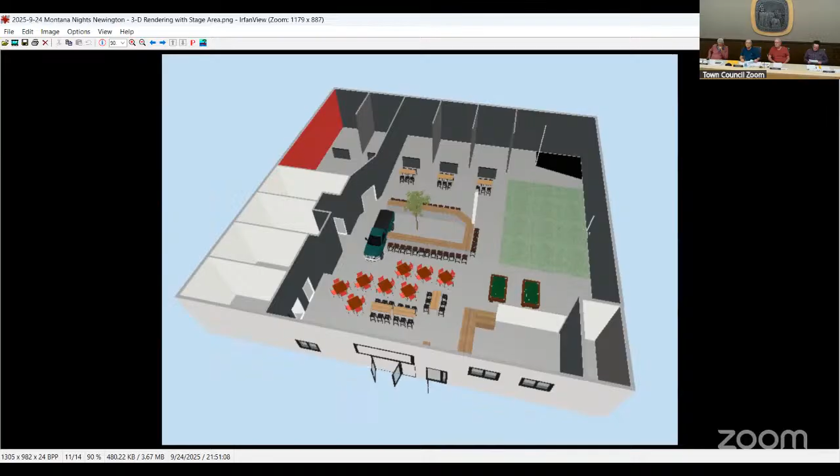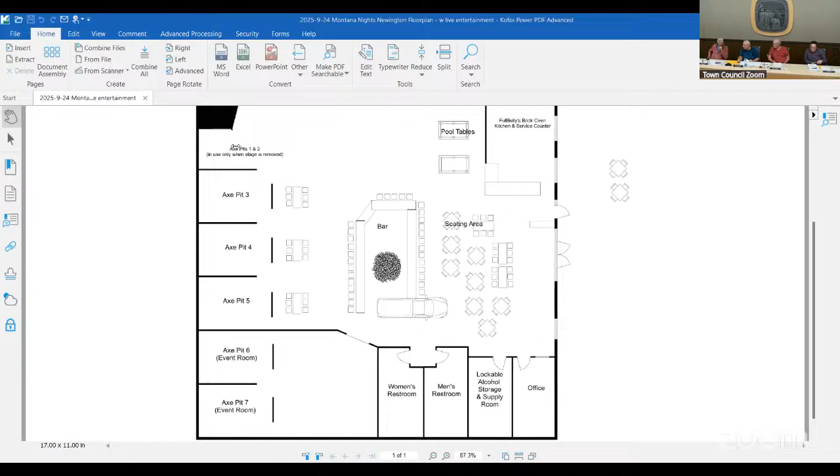Any other question? Mr. Woods? Commissioner Minor, you have any questions? No questions, Mr. Chair. Thank you. Okay, what's the commission's, okay, there you go. Anyone wishing to speak in support of this? No one online has their hand raised, Mr. Chairman. Okay. Anyone wishing to speak against this petition? No one online? No one has their hand raised, Mr. Chairman.

What's the commission's pleasure? I'll entertain a motion to close the hearing and move it to old business. Second. Second. Okay. Moved and second, all in favor? Aye. Opposed? Thank you. We'll vote on tonight.

Okay, next is approval of the minutes. I hear a motion for approval of the minutes. So moved. Is there a second? Okay, all in favor? Aye. Aye. Okay, thank you. Motion passes. New business.

Okay, petition TPZ petition 25-18, special permit 3.15.6 for a place of physical activity for personal training facility at 2434 Unit 9, Berlin Turnpike in a BT zone. Applicant Revolution Sports Club LLC, owner Trans Berlin Corporation. Robert Maybrook, applicant, revised 8/13/25, 65 days to open public hearing, hearing scheduled. We just did that one. Oh, we just did, okay, I'm sorry.

All right, old business. I'll make a motion. We move to approve special permit, petition TPZ-25-18. Reason for the approval is the application meets the requirements of the special permit criteria. Okay, is there a second? Second. All in favor? Aye. Opposed? Thank you. Good luck. Good luck. Okay, old business.

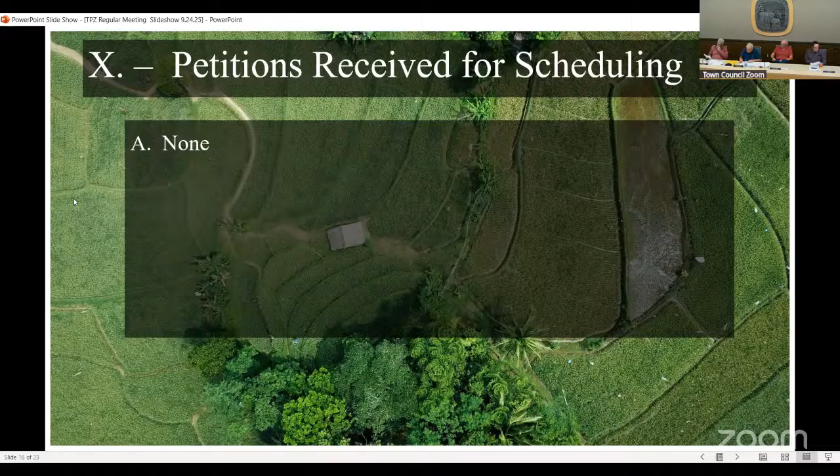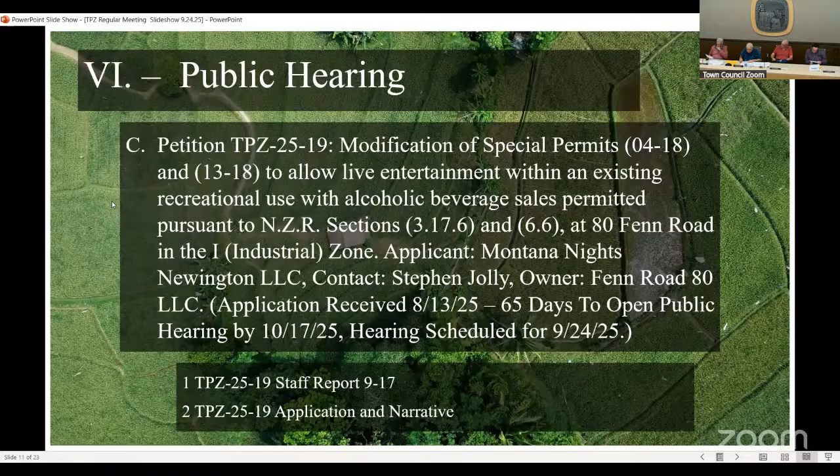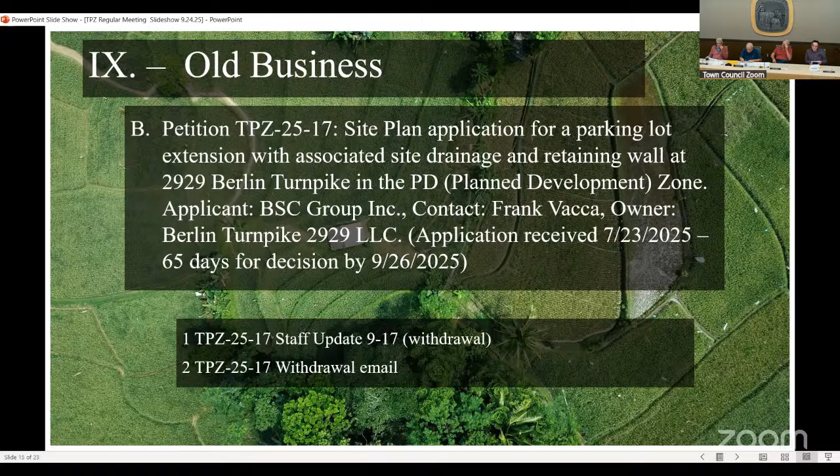Okay, next one is petition 25-19, modification of special permit. We didn't do this one. No, we didn't do this one. 25-8, sorry. Petition TPZ-25-19, modification of special permit 04-18 and 13-18 to allow live entertainment with existing recreational use with alcoholic beverages sale permitted pursuant to N.Z.R. Sections 3.17.6 and 6.6 at 80 Fenn Road in the I industrial zone. Applicant Montana Nights, contact Stephen Jolly, owner Fenn Road 80 LLC. Application received 8/13/25, 65 days to open public hearing by 10/17/25. Hearing scheduled 9/24/25.

Good. Commissioner Woods. I move to approve the modification of special permit 04-18 and 13-18 for the addition of live entertainment under special permit petition TPZ-25-19. Reason for the approval, the application meets the requirements of the special permit criteria. Is there a second? I second. Moved and second. All in favor? Aye. Opposed? Passes unanimously. All petitions for scheduling? I don't believe I had anything under there yet. Right? No. Okay. That's that.

Now planners report. I will spare you too much tonight and give you an update next time, unless there's any questions you would like me to answer next time. We didn't vote on it. Did we vote? I thought we did. We voted on that last one, right? Yes. You voted. Okay. They're all set. Every application was voted on. Yeah, you guys are all good. Sorry.

I'm sorry, Paul, town planner's update. Yep, I said I would spare you tonight. I will send out a notice about some additional training. One of the meetings was tonight, but another housing type of webinar. Actually, this one's an in-person meeting. I will send it out to the commission and also start looking for additional training opportunities. Okay. And you'll let me know if everybody's caught up on ours. Yep, I need to check that. We're coming up on that time. Right, thank you. Communications from CRCOG, they were in here. Yep.